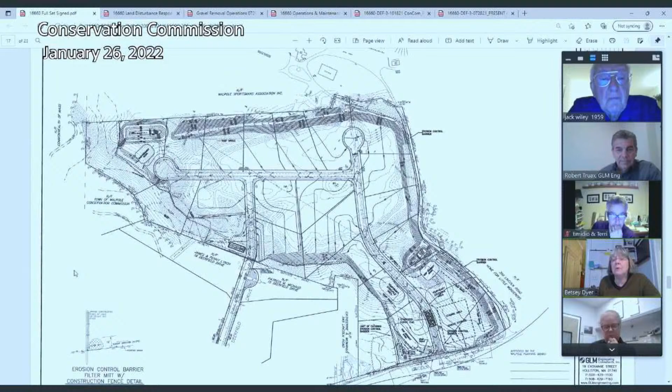And I guess I'm just going to conclude by saying, I don't think I even have a question here, that whatever it is that we end up approving is still contingent on it matching some final plan that doesn't actually exist yet. There's nothing that planning has allowed to happen yet. So I guess those safeguards are in place. We're not going to accidentally approve something that planning doesn't approve.

Ultimately everything's got to come together, and ultimately it's on you, Rob, correct, to make it come together. That's what Landis helped clear that up for me today. I was saying, like, what, that it's ultimately on you to get this all dovetailed together.

And so if you come back before us in a couple of weeks with the house lots, we'll do what we do as conservation commissioners. Right? So so you're correct, Betsey.

We can't put a shovel in the ground at this point in time. We don't have a subdivision approval. We're on appeal. So I mean, if it takes 6 months, 9 months, a year, and our thought is hopefully it's favorable to us that we can build the roadways, then we would start construction.

If in fact we lose on every account and we don't get planning board approval ever, the project wouldn't go forward, and the permits would either lapse or we'd withdraw them someday. But yes, you're correct, we can't build while appealing this with just our permit. It's in land court.

So no question then. I guess we'll see you in, some revisions. Yes. Yeah.

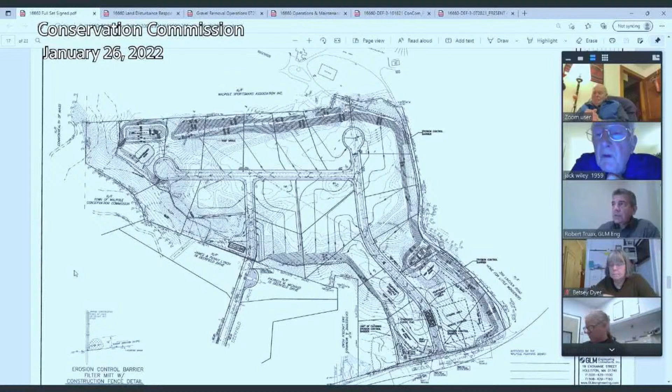Rob, does your plan describe anything to cover the issues that Al just brought up? Well, I think that's the same question Emidio asked, and I think we'll have a conversation amongst ourselves, the team here, and see how we want to phase it.

I'm hearing from the commission, I think you said this before, Mr. Chairman, at the last time we were here, that you don't want to see us go in and clear cut 24 or 20 acres or whatever it is all at once. And I think if we could phase it out, we do phase one, clear it, build a road, prep the lots, start phase two, clear it, build a road, prep the lots, and then come in and do phase three. It would limit the amount of clearing at a time.

So let us come back to you with a sequence on how we would do that and how we would phase it. Can I just add?

If I'm correct, under the SWPPP, under the construction permit, you're supposed to only have 5 acres cleared at a time, and then you have to stabilize and move on to the next 5 acres. Is that correct, under the SWPPP? When you file a SWPPP?

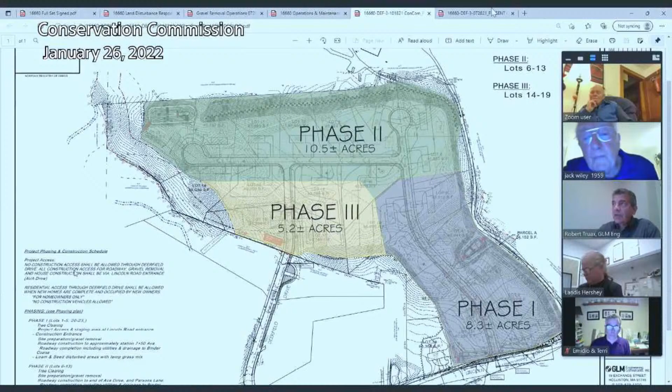So whatever we come up with probably should be shown on a plan, because the contractors look at plans, they don't necessarily look at stuff that's written up in a permit. I think it'd be important to agree on the plan. We do have some information about that on the plan, but we can beef that up a little.

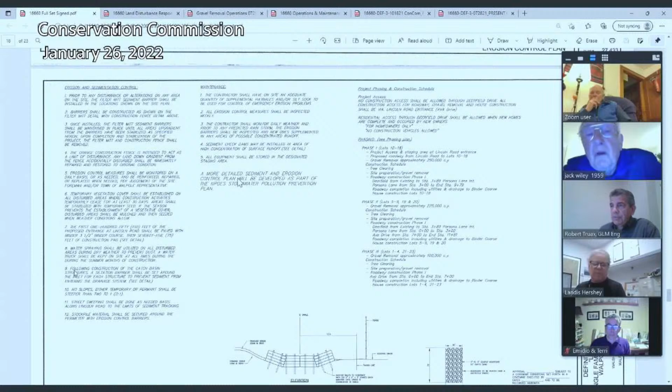Talk about watering and things like that for the dust control. And we do have a construction apron for the road that includes not just the stone, but we're going to put down a 3.5-inch binder course for the first 75 feet of road. We're going to prep all that so that when trucks are coming in and out, they're not just driving over gravel and then hitting Lincoln Road. We're going to give them a 75-foot paved surface, and then 75 feet of trap rock going into the site. So it's about 150 feet of stabilized entrance.

So there's things like that, but we'll take a look and see if we can give you a little more detail on it.

You've got a lot of vehicles coming in and out over a period of time, that's the reason for the entrance pad on the proposed road. In addition to having that, it needs to be maintained, in other words, swept if necessary or whatever. And I think, again, some kind of verbiage on the plan that would include that.

Sure. So let me ask the commission this question. I think, Landis, you might have spoken to John about the individual lots.

So the lots are going to get temporary vegetation. Then some may get temporary, some may get permanent. The ones that don't get built immediately, like in phase one, we'll put some loam down and seed those temporarily until they come in and start building the house. Some of them they'll start building the house on, so the road will most likely have a binder course at that point in time. The binder will go down first.

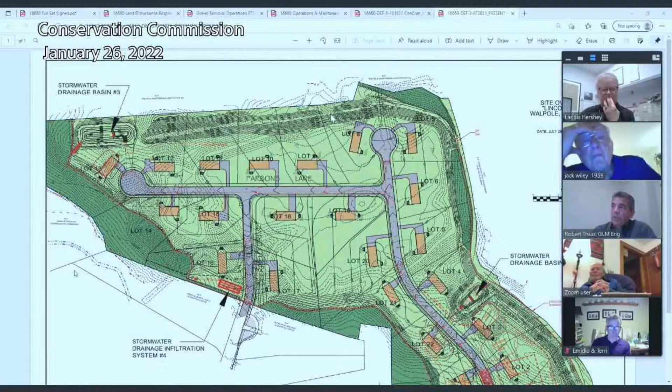So this will be about 15 to 20 feet in elevation when you walk out the back door of these houses. And so the idea was to try and get the berm high enough that even when you're looking out the second floor window, you can't see the Sportsman's Club. They'll see probably the roof line, but they won't see the windows. So we tried to get the berm as high as the gutter line on the house.

But for the lots, just again, so I understand, the abutters behind lot 14, the Shaws, if you scroll down, there, lot 22, all of that green stuff is undisturbed. This is all undisturbed. This is the riverfront right here, the 200 foot. That's the limit of what actually goes down in here, but there's no work in the 200 foot riverfront area. So all this is staying green.

Okay, the drainage, the abutters, you say this is the abutter, but the abutter's house is way up here by the arrow. But there's green on the other side too. Yeah, there isn't an abutter over here, but this abutter sits right in here. This is all wooded behind his house.

From that drain easement where it says drain easement back, that's all wooded. So that's great. And then for the other two abutters, that green space also would be untouched? This will all stay right here, correct? All this over here is staying.

Okay, and then you're putting, that red line is something that you're putting up? Those were the squiggly lines. It looks like it's red in some places. The red line in most spots is an erosion control barrier, which will signify the limit of work, so the contractor will know he can't cut beyond that.

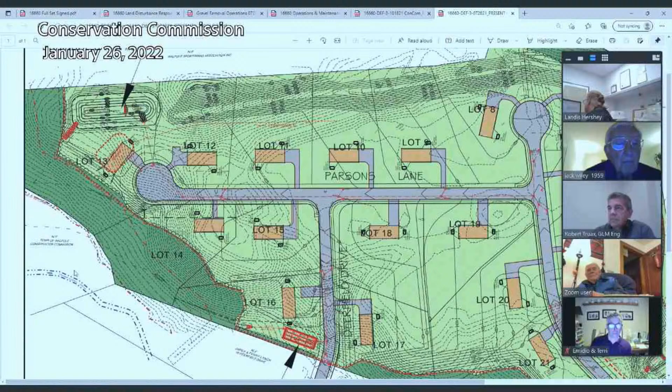If you look at the non-colored plan, there's two sets of dotted lines. One is a square dotted line, that one we see. Then there's a continued round dotted line that matches the red arc. It looks like the red arc was more the 200-foot perimeter, and that straight line was something different, and I was trying to understand the difference.

There should be circles on the lots too. I don't know if you're seeing these circles? No. So if you go to page 4, I'll explain better maybe. This is what I was kind of looking at first.

Page 4 kind of showed the drainage basin, see, there's that straight dotted line there. Okay, that's going to be the easement that goes around the basin that the town will have the rights to, so they can go in and fix it if it gets screwed up, if we don't maintain it properly. So there's an easement around the basin.

So then this circle, that's just for zoning purposes. That's just required under zoning that you have the circle. And then this dash line that goes around the lot, and this one around the circle, that's the building setback line. You can't build there. Those are the setbacks from the lot lines. We're not going to be way down by the river, but that's the actual zoning setback line, not the setback from the river, but that's a zoning setback.

Okay, so that easement line isn't part of a boundary, that's part of the drainage easement that's necessary because of the emergency runoff basin? That's something different? No, that's the drainage easement for the drainage basin for the runoff. Yeah, that basin is built within that.

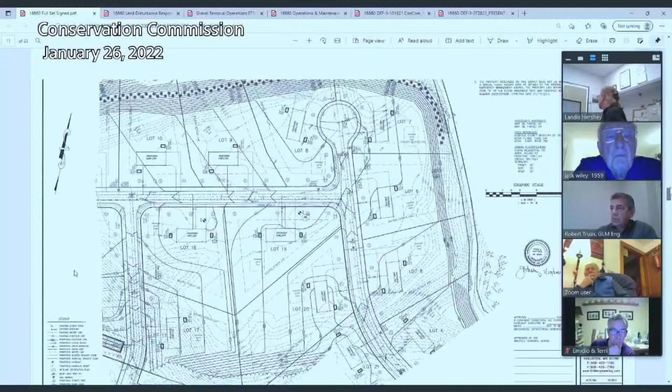Right, so that line where the squigglies are, or whatever you want to call them, here, yes, that continues, that's the easement line. So the basin is within that. It goes around this spillway and it goes back to the property. So this whole piece right here around that line is all the drainage easement.

So then what is that straight dotted line to the left of the squiggly line? Straight dotted to the left of this one here. Yeah, so if you follow that, is that the 200-foot? This is the 200-foot right here, coming all the way down.

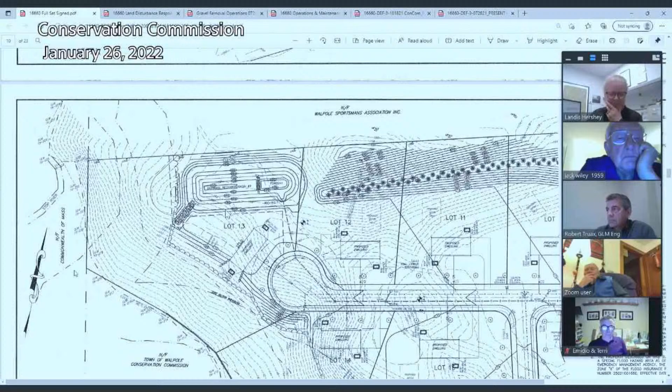This squiggly line you talk about, that's the limit of work, yes. Okay, so that squiggly line that continues up by the drainage basin, that's also the limit of work? Correct. Okay, got it. I thought it was, because they had that dotted line, I wasn't sure what that meant. Thank you, that was very helpful.

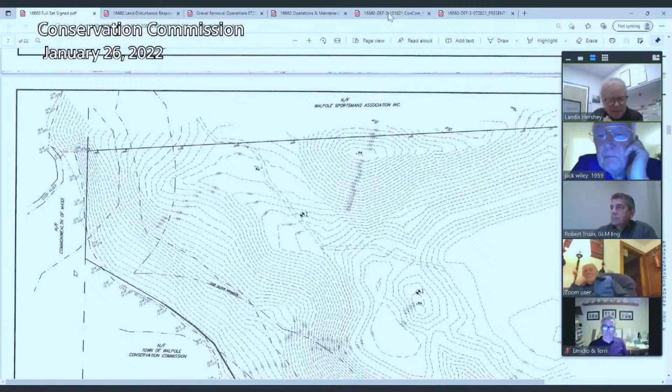Okay, anything else you all set, Eden? I think so. I'm sure I'll have more when we see the revisions. Let me mute myself. Thank you very much.

There's another abutter, Kay Williams, that has a comment.

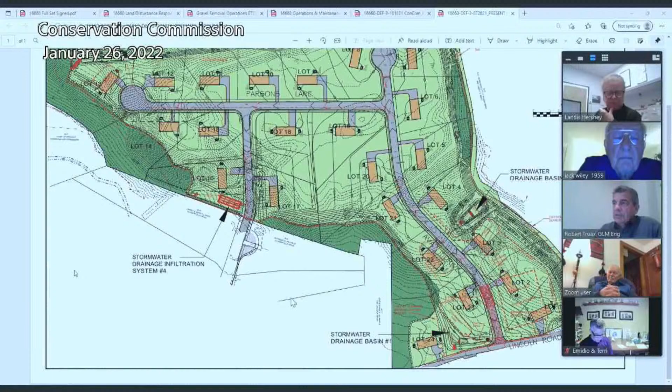Yeah, but we were told that a berm would actually be built. Well, it technically is being built, but it's being built by grading on the back side of it. It's not like the one on the back side of the site, where we're physically putting all the material there. This material's already here, we're just going to cut it down on one side and leave it standing up on the other. So if we look at that berm, it's not really a berm, it's just that.

Yeah, when we look at that, will we see all the things that are there now, the trees, the bushes? You'll see some of it. I don't want to misrepresent it - when the trees come down, you'll see the clearing, you'll see through the woods. I don't want you to get the impression that I'm leaving enough trees there that you'll never see any of these houses.

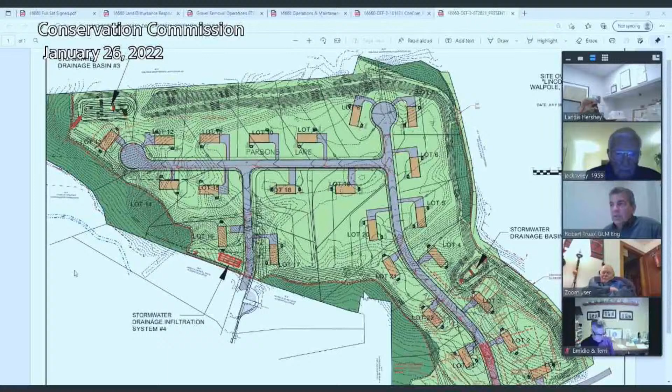Oh, I understand that, but on our side of the hill, you're not removing any trees, correct? On our side of the hill? On the downhill side of the hill. Right, okay, okay, good.

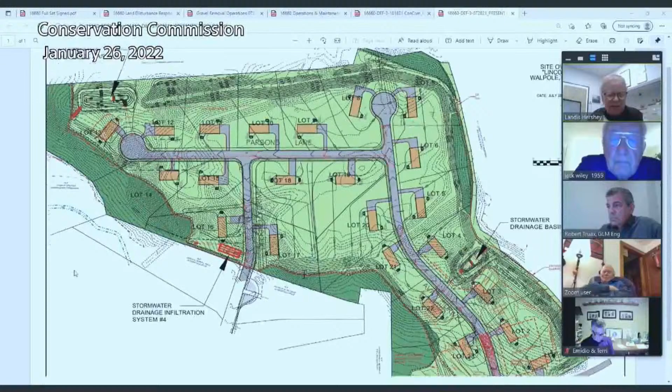So maybe, Rob, just down by Deerfield Drive on that side, what is the lowest elevation at your lot line? I think it goes down about 180, and then the top is 194, 196 maybe, but it still goes down on their property a little. So it's about 14 feet up.

We actually staked this line in the field for those people who live right here. My surveyors went out there and staked that last fall - the top of the ridge. We went out there for this woman at 545 McManus, Catherine, I don't know if she's on the line. I'm not sure, maybe we have the abutter wrong, but we staked this for the abutter right here, and I think we staked her lot corners as well, so she could see the limit of clearing in the lot corners if anyone wants to go out and look. On the commission side as well, that's staked - we staked that limit of clearing, that red line, we staked those corners. We did that for the abutter some time ago.

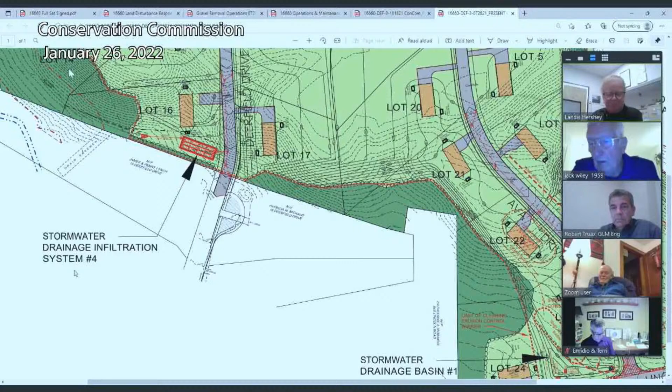Now's the time. Just a minor thing, Rob, on page 13, lots 1 through 4 are labeled incorrectly. They should be lots 2 through 5. It doesn't impact anything, but I'm assuming you'll want to clean up the plans so they're labeled right. Thank you.

Rob, how much time do you need? How long do you want, when do you want revisions submitted prior to the meeting - 10 days, 2 weeks? I don't want to give you plans 2 or 3 days or 5 days before the meeting. If you want, we can go out 4 weeks. That'll give us 2 weeks to give you plans and 2 weeks for you to look at them.

I think that's a good idea. Then that gives time for Carl to also take a look at them, so we can both be on the same page. So you want to go to the 26th of February, or the 23rd of February?

Sure, February 23rd. So do we have anything else on at this point, Landis? Nothing advertised and scheduled. Okay, so someone make a motion to continue the Lincoln Road hearing until February 23rd, 7 PM.

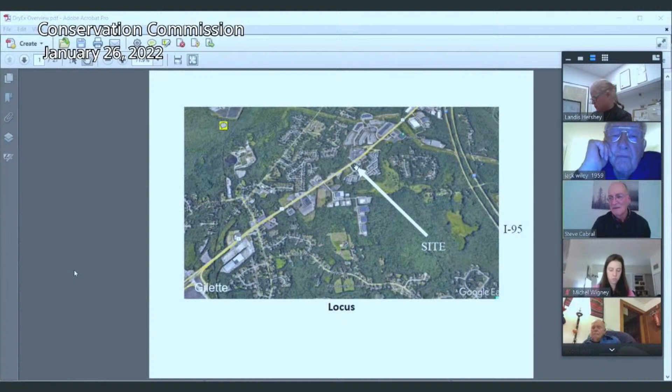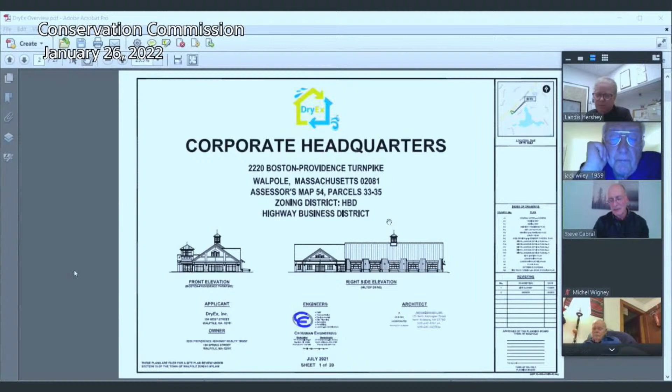Basically, what we're proposing is the new corporate headquarters of DryEx. One of their specialties would be basement waterproofing. The project is in the Highway Business District, and it's not within any wellhead protection areas, but it is within the town's Watershed Protection District 3.

We're proposing a relatively small parking area with enough maneuvering ability for fire trucks to come in off Route 1, loop around the building, and then exit on Hilltop. The site is highest along Route 1, and it drops by about 8 to 10 feet from Route 1 to the back. Because of that natural topography, that's why we're locating an infiltration pond at the very back of the property.

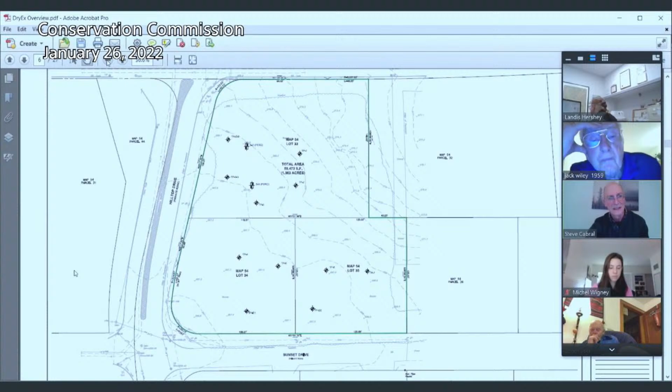This plan provides the general topographic conditions, and as you can see, it's a very gradual drop-off and slope towards the back. All of these circular symbols represent the many test pits we performed out there - some we did on our own, but most we had Carl, the town engineer, witness. Because there are no public sewers, we also had some of the soil tests witnessed by the town's health agent, because we will have a small septic system.

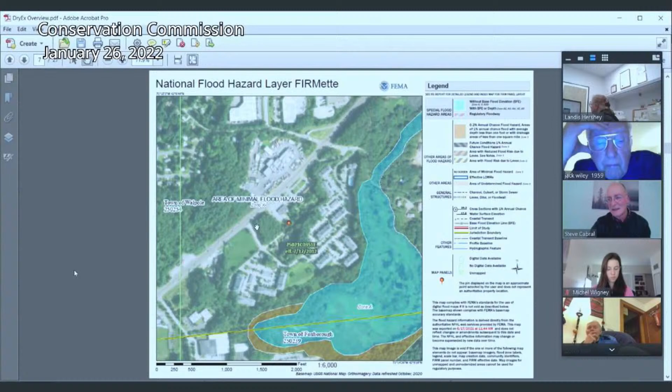One thing I wanted to point out is that we're outside of any flood zone areas. The green area here with my cursor is where the site is, and as you can see, the nearest flood zone is probably 1,000 feet or so to the east. There are also no wetlands on the property - the site's good sandy soil, with no evidence of any wetlands, and no depressions on the site whatsoever.

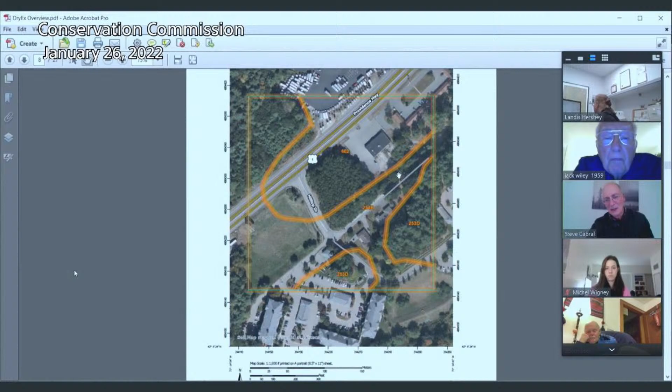This is just the NRCS, the Natural Resource Conservation Service, soil map, which we used before we performed any soil tests to get an indication of what the soils are. NRCS identifies the soil on the site as urban, meaning most of the land has been urbanized or tilled over the years. But we know that's not the case for our property, so we looked at the surrounding soil, and that was identified by NRCS as sandy loam.

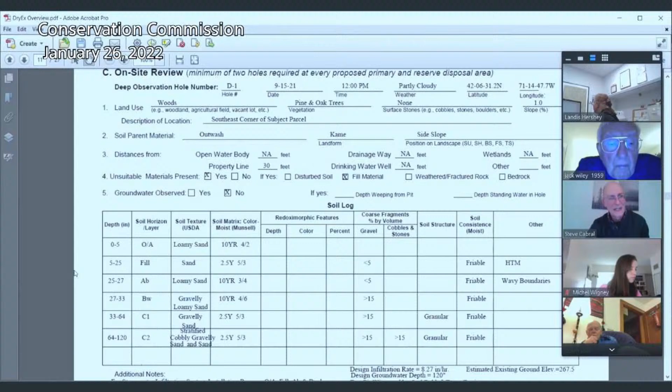And then we followed up with the many soil tests that Carl mentioned in his letter. This is just one of the samples of the soil logs. On this one, we excavated down about 10 feet, as you can see on the left. The soil was all loamy sand, gravelly, very good draining soil. And as Carl indicated, there was no sign of any seasonal high water table. So for the design, we're using a 10-foot deep water table.

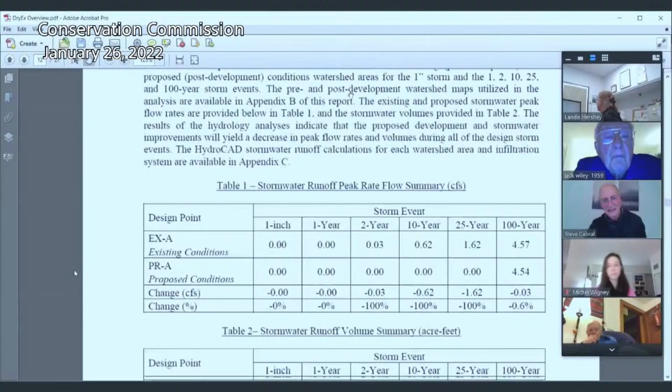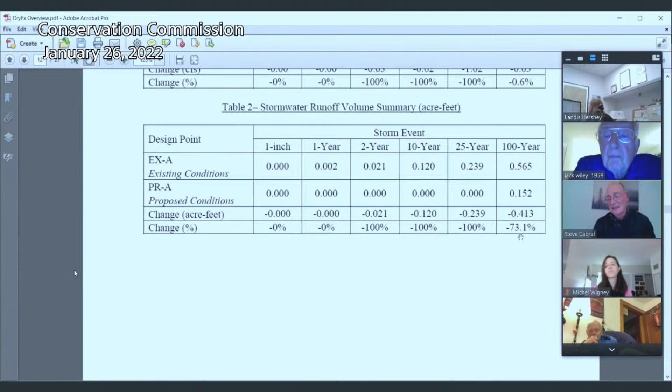Now, when it comes to the overall drainage design, I'll just go right to it. Because we have such good soils and the ability of building an infiltration basin, the EX represents existing conditions, the PR the proposed. As you can see, for the runoff volume exiting the site, for all storms up to the 25-year storm event, we're going to capture all of the runoff and infiltrate it on site. It's only during the 100-year storm event that there'll be any effluent leaving our infiltration pond, and even that discharge is 73% less than the volume that discharges today. So in regards to any drainage issues in the area, there's going to be a significant benefit.

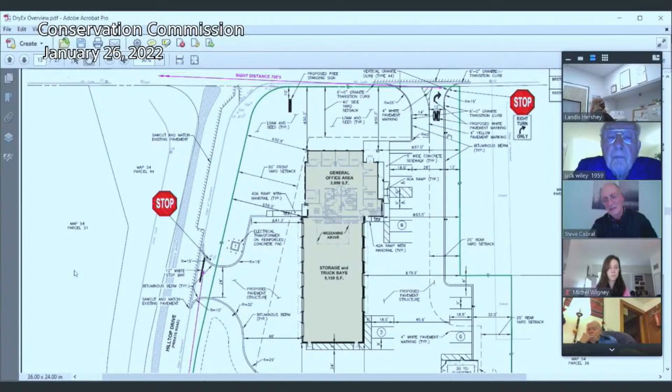Okay, what I have here is just the overall general layout plan to give you a feel of access. Basically, on Route 1, this is an area where there's a median down the center, so we only have right-in, right-out access on Route 1. So the intent will be employees could either come down Hilltop and enter, or they could take a right turn into the site. They'd park right at the office areas, and then they could exit, of course, with the right turn only. We wanted to minimize disturbance, so we kept the number of parking spaces to the absolute minimum.

You could see we have a lot of excess space where we could have added more impervious surface, more parking, but we really didn't feel that was necessary. And with this parking we're providing, it does meet essentially the minimum required by zoning, and it does actually provide just as much parking as the corporate headquarters of DryEx needs.

Okay, this is the grading plan. Basically, we designed the site in a manner to minimize cut and fills throughout the site. In order to do that, we basically took advantage of the natural terrain. As you enter from Route 1, there'll be a gradual slope down, and then the garage bay areas are slightly lower than the general office area. Then, because of the garage bay doors on both sides of the building, the ground will be relatively level around the building, and there'll be a slight 2-foot elevation drop to get to Hilltop.

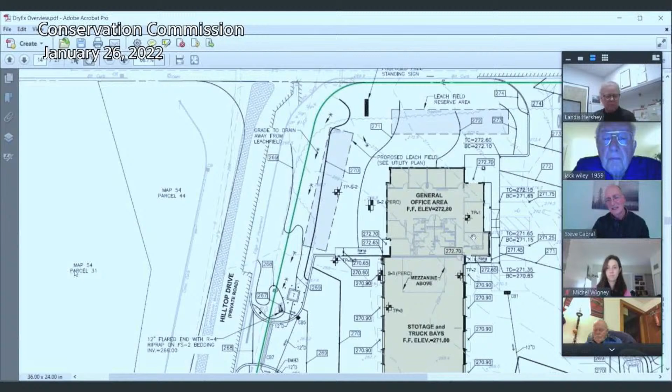As you can see, all of the drainage will be collected on site with catch basins, and they'll be routed into this infiltration pond. The shaded areas at the top and to the left represent the location where the septic systems, the leach fields, will be. Now, at DryEx, the maximum number of employees is relatively low, so the amount of septic system effluent is essentially no more than a 4-bedroom home. It's not a very high user of septic flow.

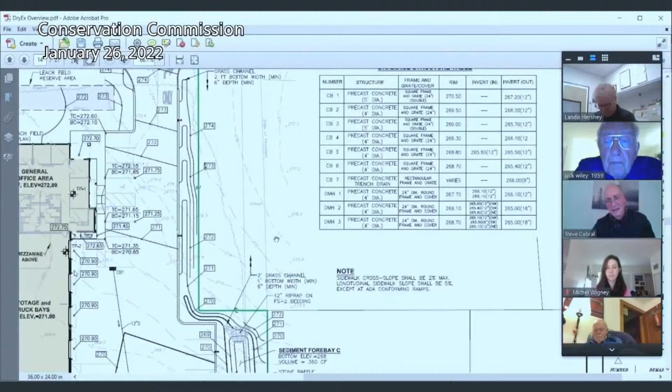And again, we'll be applying to the Board of Health for the leach fields, and we will not be seeking any waivers by any means. Now, with the runoff, we also have an adjacent site, right now vacant, but there's a paved parking lot and it looks like an abandoned building. Some of their runoff actually drains onto our site. So what we've done is accommodate their flow by installing a swale so we can capture their runoff. We'll have it flow through a sediment forebay to help remove the larger solids. And then our infiltration basin is actually sized to infiltrate all of their runoff up to the 25-year storm event also.

Now, I did hear the chairman say, as he was reading Carl's letter, that there was a question about a 6-inch pipe. What that is, the 6-inch pipe is not needed for the operation of the system. What we try to do, and what we always do, when we design a system, is match the DEP recommended design as much as possible. And in the DEP Stormwater Handbook, what they recommend, where feasible, is that you install a perforated 6-inch pipe below the bottom of the infiltration basin with a gate valve.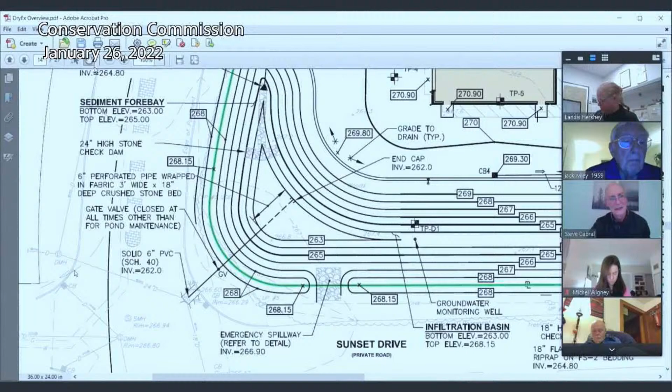And as you can see right here, we say that the gate valve will be closed at all times other than for pond maintenance. The only reason for that 6-inch pipe is so that during maintenance, when you're removing any sand or silt, if there are any pockets of water, you could open up that gate valve to help expedite draining of the pond during construction. But as I said, it's not part of the operation during rain events, because that gate will be closed at all times other than maintenance. So if there is any concern, that 6-inch pipe could just be eliminated.

Okay, the next plan provides essentially the overall utilities. It shows that we'll be bringing a new 8-inch water main down from Route 1 down Hilltop into the new building. We'll also have underground electric and telephone going to the building, a gas service, and at the top left, a 1,500-gallon septic tank flowing into our standard leach field, which will be in the grassed area.

On this sheet, we have our standard soil erosion and sediment control plan, where we discuss measures to control dust and any potential erosion during construction. On this site it was relatively easy because everything drains from Route 1 down to the back. So we're proposing the silt fence, or compost filter sock, around the entirety of the site, at the bottom along Sunset, and also at the top to protect the future infiltration basin.

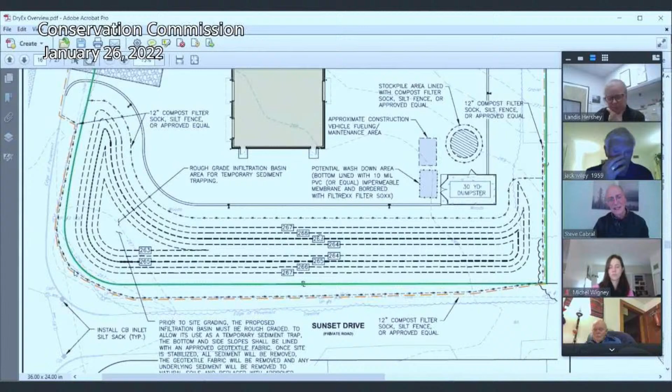Because all of the runoff naturally drains towards the back at Sunset, we looked at different options to create a sediment forebay, and what we decided was the most effective option would be to partially excavate the area of the infiltration basin, line it with filter fabric, and use that for the temporary sediment pond. When the site is stabilized, we'll be able to remove any collected silt and the filter fabric, and then continue with construction of the full infiltration basin. Normally we wouldn't use an infiltration pond as a sediment pond, but because of the topography we felt it's really the only option, and we can mitigate any potential impacts by utilizing a filter fabric on top of the excavation.

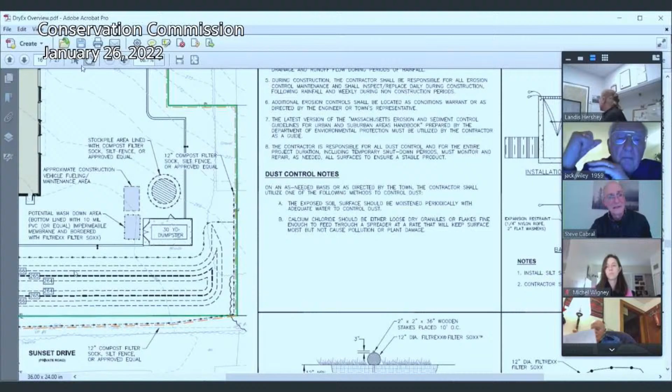As you can see here, we do mention dust control notes. We want to make sure the contractor's aware that he may need to utilize water or calcium to control any dust that could impact the area. And we have all of our standard details.

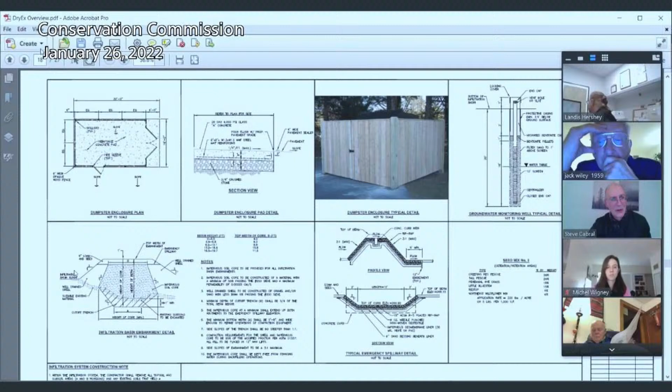Continuing on, we just have our standard construction details of the curbing, the sidewalks, and so on. We'll have a concrete pad for any type of waste disposal. And we have additional details, like we're recommending putting in a groundwater monitoring well through the bottom of the infiltration basin.

That will allow us to monitor the water table at any time during the year, and would also allow us to take water quality samples if there was ever any need to. We also provide details of how the earthen berm will be constructed so that water will remain in the infiltration pond and seep, with an impermeable soil core so that water won't seep through it. And then, as Carl mentioned in the letter, the bottom of the infiltration basin is substantially higher than the groundwater we anticipate.

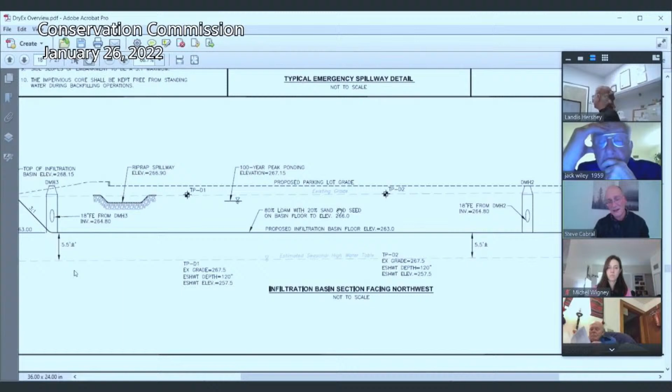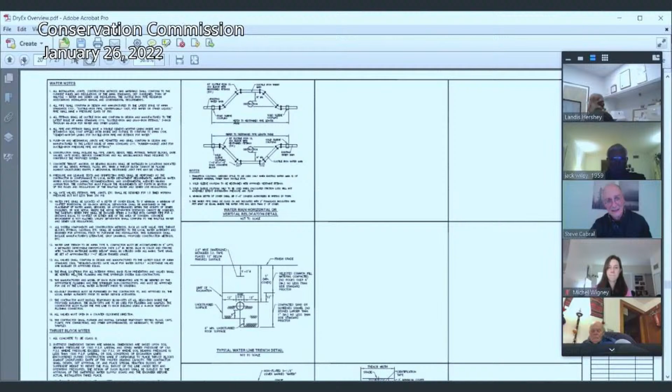The details show that the bottom of the pond is well over 5 to 6 feet higher than the seasonal high water table. And again, that's a very conservative estimate, because we actually excavated more than 10 feet and never did hit any sign of a seasonal high water table. Then we also have our standard catch basin and drainage details, water notes, and septic system details.

Then we also prepared a lighting plan to show that the design would be dark sky compliant. The parking lot and walkways will be lit so that safety will not be an issue, but we've laid out the lighting so that there would be no impact onto the abutting properties.

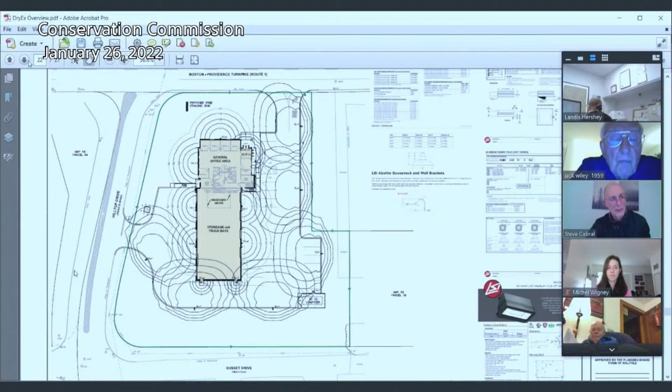And just more landscape details, the floor plan of the building. As I said, we have about 3,000 square feet of general office space, and then about 5,000 square feet of truck bays in the back.

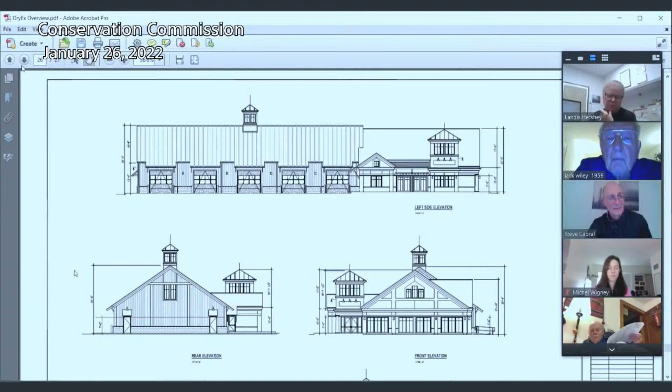We also provided the general image of what the building facade would look like. At the very bottom, this would be the view from Route 1, and this would be the view from the main parking area. So I consider it to be an attractive building.

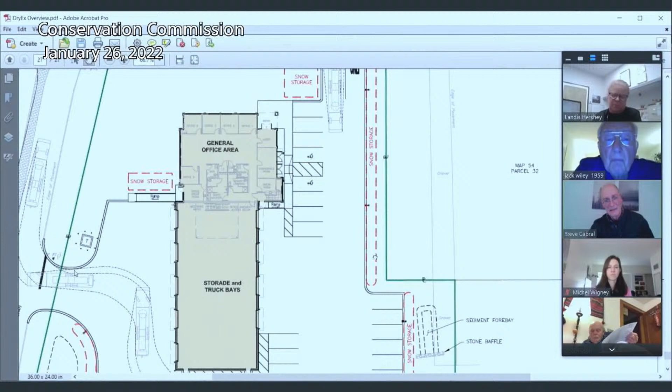We also provided for the fire department a truck turning template to show that the fire trucks could enter the sites without having to extend into the opposing lanes, and they could maneuver around the sites and back out through Hilltop. We've also identified areas along the front side and back for snow storage. If there was any significant storm event, there may have to be some removal, but for typical snow events, we have adequate space for snow stockpiling.

We do not recommend that it be stockpiled in the infiltration basin because we don't want the subsoil compacted. That was another reason we put the evergreens there, so the snow would not be easily pushed into that area.

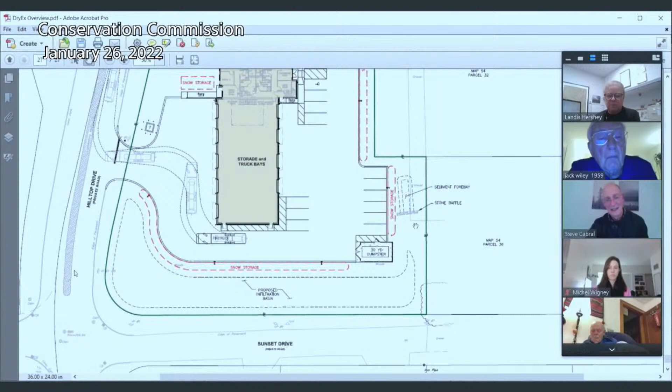Now that's a very quick overview. As I said, we did receive Carl's letter just hours ago, and I haven't had a chance to read it all, but based on listening to the chairman's read of the letter, we don't see any issue with Carl's comments whatsoever. The main bullet point I gathered was that he indicated the overall design is acceptable, and he didn't see any reason for any major changes. They all seem to be relatively minor.

It looks like his main question was the reason for that 6-inch. As I said, that's solely there as an option to assist during maintenance, but it has no impact whatsoever during a rain event because that gate valve will be closed at all times.

Okay, Landis? Yeah, so I just received Carl's letter late too. I asked him to get one together before this hearing, and we both agreed that the stormwater management was done rather well and very thoroughly.

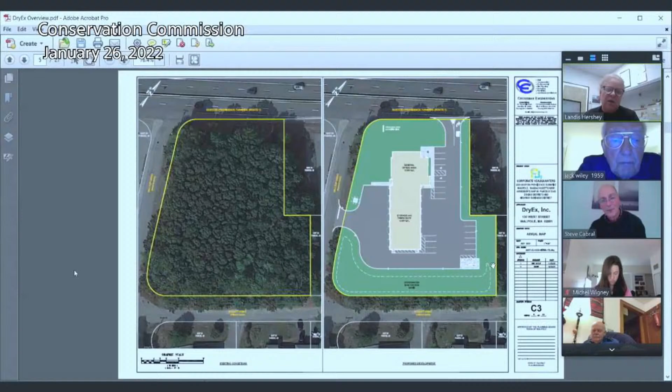One of my questions is, as we're looking at this picture right now, it's a vegetated site. I can't tell from the picture if that's mostly trees. I think in our stormwater erosion control bylaw, it does ask to give an inventory of the vegetation on the site and if there's anything that can be used in the design or saved. So that would be one of my questions. It didn't seem like from your plan that anything was going to be saved.

I was looking at your landscape plan, and I couldn't quite tell how many trees were going to be planted. There didn't seem to be a number of the amount of trees that were going to be planted. So I was wondering about that.

The other thing I noticed is with your dumpster down to the rear of the lot next to the infiltration basin, I did notice you had a fence, but I'd like to see a pad with a rim, just because you're right up against a basin and we want to prevent anything from getting into the basin.

I didn't get to all your material, it was all very thorough. Maybe if you could just go over briefly your phasing of the lot, how you're going to go in. I'm assuming you're going to go in and cut down all the trees, put erosion control up, and grub and prepare, but if you can just briefly describe that.

I just have, my other comments are more that would be conditions if the commission closes and issues a decision.

Okay, hopefully I'll remember your other questions, but basically, because of the change in topography from front to back, there's about an 8 to 10 foot drop from front to back, and we need to build a level pad to create room for a functional building. Because of the need for a level pad for the building, as well as the need to build a septic system, which really can't have mature trees within 10 feet because we can't have the tree roots growing into the system, we do essentially have to remove all of the existing woods on the property, unfortunately. That's why we had our landscape architect prepare a thorough landscape design.

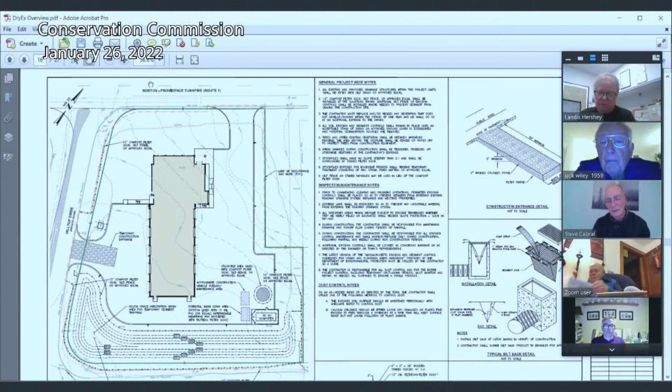So for this site, being about 1.3 acres, less than 1.5 acres, it has to be done in one phase: install the erosion controls, do the tree clearing, install the sediment basin. Only after those steps are completed can they begin removing or moving around the soil. We estimate the excavation on site will be about 1,500 cubic yards, but we'll need about 2,500 cubic yards of fill brought in. So we have not designed this site to have a net removal of soil. We intend to keep the soil on site permanently, and we'll just bring in new material to create a good gravel subbase for the buildings.

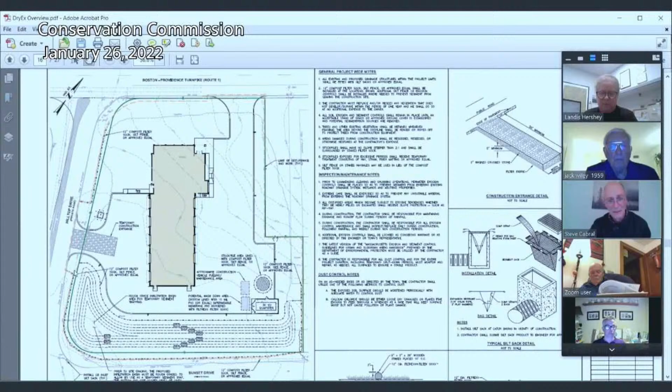Okay, and when it comes to the dumpster corral, we do have a 6-inch reinforced concrete pad, but I agree it's a good idea that we could install a 6-inch lip on the outer edge of that dumpster pad. That would be easy to do, and that is a good idea.

Now, when it comes to the landscaping, let me go... I could easily have someone count, but as you can see on the right side, the column, the items in that column just represent the variety of species. So this indicates 1, 2, 3, 4, 5, 6, 7, 8, 9 — essentially 9 different species of trees and a dozen or so shrubs.

Now, the truth is, in the old days we used to always give a count on our plan set, but we found there was an issue with contractors if the plan didn't match the count — which one do they follow? So we have our landscape architect design the landscaping to provide the size and variety as opposed to the count. But we could certainly provide that to you.

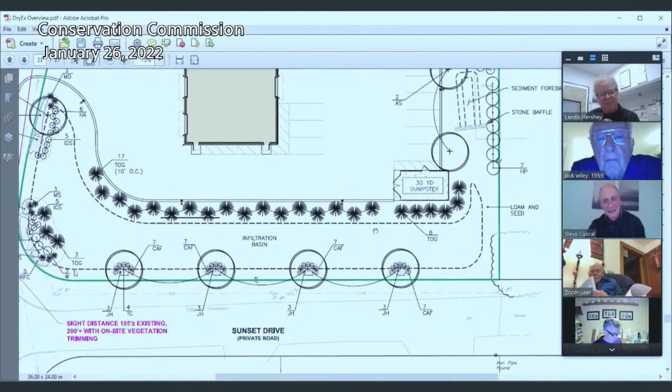There's certainly well over a couple dozen. Actually, if we looked in each little area, for example right along the infiltration basin, this shows there are 17 of that specific variety, plus an additional 6. On the right-hand side there'd be 7 of the HPs. I was starting to do that, but it was getting cumbersome to look at the chart to find the species and then go to the plan to count how many.

But yes, I guess the point would be that the trees are hopefully hardy, somewhat comparable indigenous trees, and not just decorative ornamentals, so they'll have some value for shading and climate control. Yes, those are certainly good points, and that is one of the goals of our landscape architect.

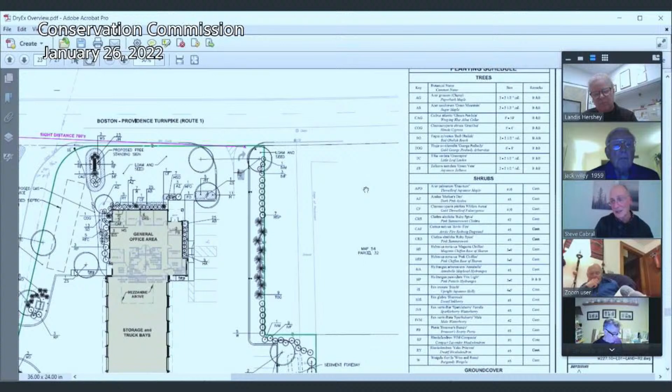Okay, and so I think you pretty much answered all of my questions. Oh, thank you. Okay, so are you done, Landis, that's it for now? Yeah, go ahead. Okay, I'm all set. Okay, Dean? Yeah, no questions, I thought it was thorough. Bailey, no questions. Doug, I have a couple questions.

One of your plans showed a vehicle fueling area. Is that only during the construction phase, or the whole time it's occupied? That is only during construction, and the only reason we show that is it's one of the recommended features that DEP and EPA recommend we include on a soil erosion control plan. That's really not meant for trucks — it's like if they have a chainsaw, that type of equipment, certainly not vehicles.

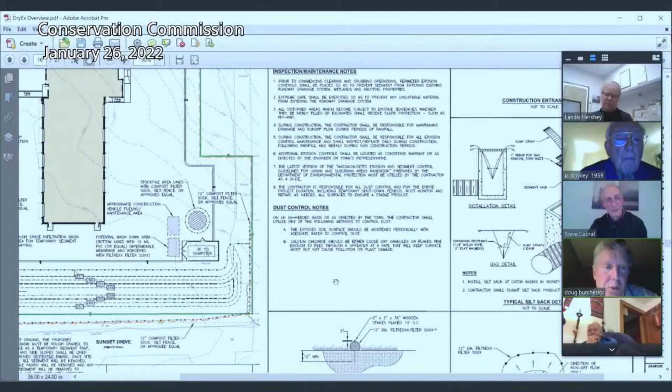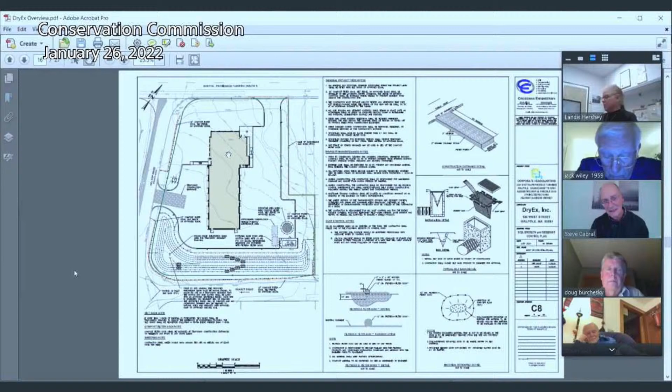Okay, and then another question: inside the building, is there any chemical storage going on there? Only, no chemical — there would only be solid products like their equipment. But if for some reason they happen to have any, it's not a company that relies upon large volumes of chemicals, so it would only be small quantities that you'd typically find at any type of business.

Oh, one thing I should have mentioned, and I'm glad you brought that up — because there will be vehicles inside the truck bays, there will be a floor drain. What we're proposing is that all of the floor drains will be connected into a solid holding tank, and that holding tank would have to be pumped and brought to a licensed facility. We wanted to make sure the floor drain certainly cannot go into our septic system, and certainly not into our drainage system.

And Steve, can I jump in on the chemical question real quick? Yes.

The company DryEx Waterproofing acts basically as the hub for a predominantly off-site contracting business. Most of the work they do is installation of sump pumps and other basement management systems. So what will be predominantly on this site are the offices that manage those appointments and the business itself. The back area for truck bays and storage will be predominantly hard materials like aggregate, equipment like mechanics, actual pumps, and all the trucks going to homes. So minimal or non-existent chemical storage.

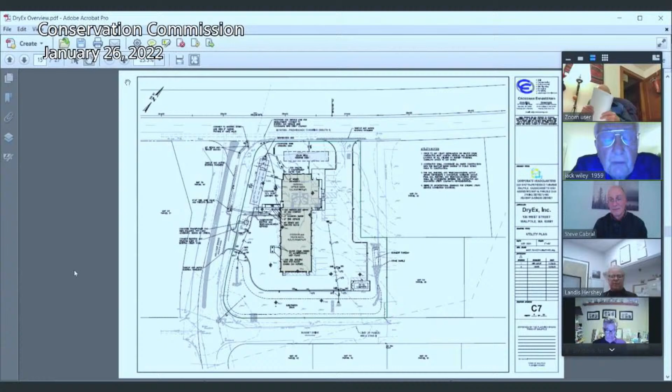There are two primary methods of treatment. Because the soil is very sandy and has a high infiltration rate, we're obligated to remove 44% of the total suspended solids before the water gets to the infiltration basin. So we have two mechanisms: deep sump catch basins and a sediment forebay. Only after the water flows through the deep sump basins and the sediment forebay does it overflow into the main body of the infiltration basin. So essentially, we're going to remove the majority of the solids before it gets to the main body of the pond, where the water will seep into the sandy soil.

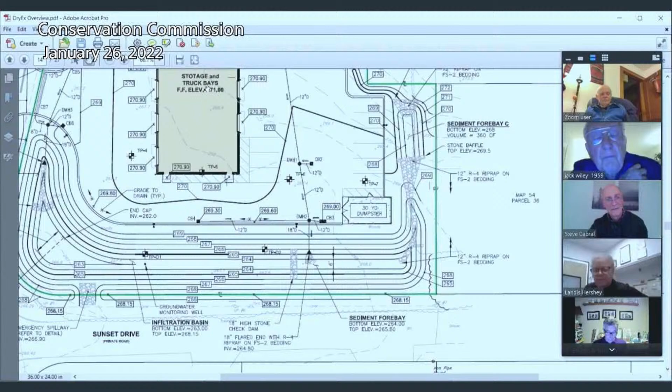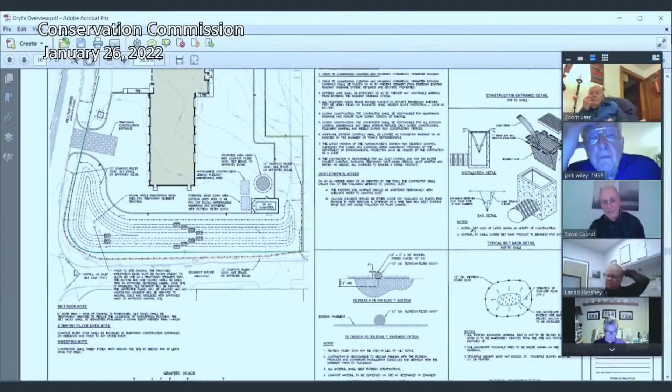What about oil dripping and that sort of thing that's typically on a parking lot? For all of the deep sump catch basins, we're going to have hoods, and the reason for the hoods is that they provide an opportunity... let's see if I have a detail. So it's a typical skimmer for oil and gas, yes, we have a typical hood. Here it is, the catch basin hood. So with that, any floatables are going to be kept inside the basin because of the hood.

Do you have a maintenance schedule for that? Is that shown on... We do, as a separate document we provided, an operation and maintenance plan.

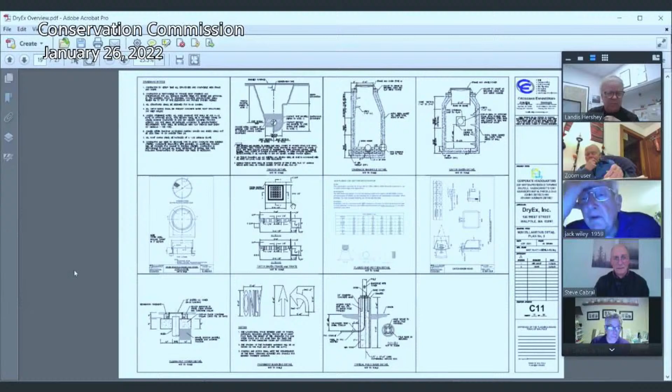Okay, good enough. Anybody in the audience have any questions or comments? See anything, anybody, Landis? If there's anyone in the audience, you can just unmute yourself and speak up, or let us know in chat. Okay, there doesn't seem to be any comments.

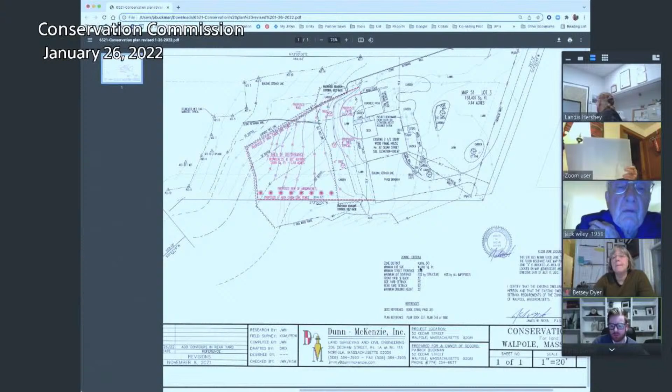Yeah, right there. And then one—what's the scale on this drawing? One inch is 20 feet. So probably one halfway up the length of the fence. Up the side? Yeah, somewhere around in there. And then one further up where that bends.

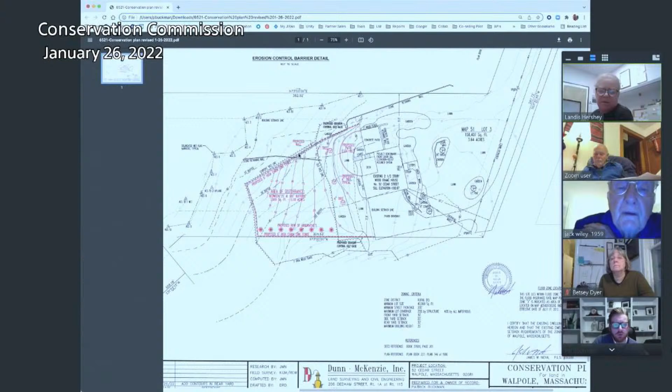I don't see what that stone wall is—is it? Yes. Okay, so one up there. Keep going up a little more. Yeah, right about there. I would move it back to where the stone wall is, you've got a line there. I assume that's the stone wall? Yeah, where the stone wall curves right after the fence. Just keep it there, so you'd have 1, 2, 3, 4 plaques.

You can get the detail from the office on what goes on the plaque. In this case, if that fence is all the way up there, you could mount it on the fence since those posts would be permanent. Is that okay, Landis? Yeah, what we would do is just reference it in the order. Okay, four plaques. All right, does anybody have anything else?

Okay, someone make a motion to close the hearing. I'll move it. A second? Okay, second, was Al. All in favor—Dean, aye. Bailey, aye. Doug, aye. Medio, aye. Betsy, aye. Al, aye. Jack, aye.

Okay, and the order, as we have stated—anything else to add? We'll just review with reference to you: the 4 plaques, and that if there's any stockpiling of material, it should be ringed by another set of erosion control. Was there any issue with tracking, or is that driveway paved? Yes, it's paved. Just put in something that if dirt gets carried down into the street, it needs to be cleaned up. Okay.

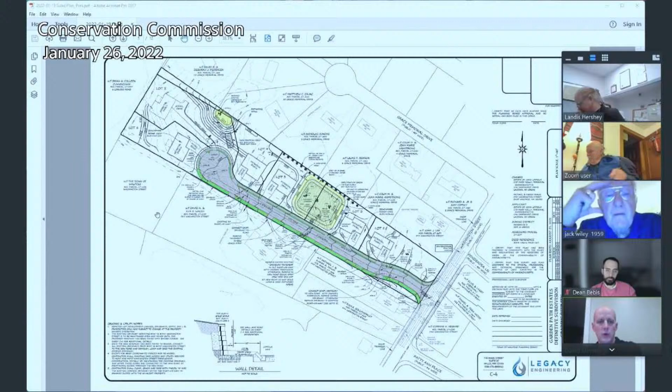This is a proposed 6-lot, single-family subdivision located at 585 Washington Street. It's close to the Bird School, just beyond the Bird School, heading towards Norwood on the left. At the time, there were no wetlands on the property, so this is strictly a land disturbance permit. At the time, we had not yet appeared before the planning board.

Since the October meeting, we have been working with the town engineer, Landis, and the planning board on a series of very minor plan changes. The substance of the design has not changed at all. If you recall, this is a unique site because all of the surrounding areas drain down into the property. There's a low point at the bottom of the property, right in the middle, so it's really impossible for runoff or erosion to leave the property. So we have a stormwater basin designed here to accommodate the additional runoff from the proposed homes and the proposed road.

We have a comprehensive stormwater management design, which has been reviewed by Carl. We have an erosion control plan and a stormwater pollution prevention plan that spells out all the traditional requirements for sediment and erosion control, including construction entrances, perimeter controls, and periodic inspections. I know Landis has a few notes she'd like added to the plan, which we're happy to do, but we're hoping we can close this tonight and deal with that as a condition of approval. Beyond that, I'm happy to answer any questions.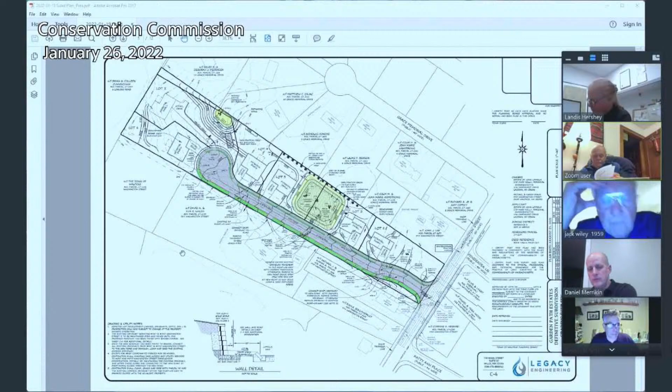Okay, someone make a motion to close the hearing? So move. Second. All in favor? Dean, aye. Bailey, aye. Doug, aye. Emidio, aye. Betsy, aye. Al, aye. Jack, aye.

Okay, the order, Landis, do we need to make a note about that wall or just wait and see what happens? I guess wait and see. Okay, usually if it's an interlocking wall that's structural, we don't want it to change over to a rock wall, which isn't structural. But how high is that, Dan? There aren't any rocks out there, so it's only 3.5 feet. It's not really structural. And it's not a significant wall. Okay.

Okay, so we don't need anything else included other than what you mentioned in your report? No. Okay, all right, someone make a motion to accept the order as noted. I'll move it. We have a second? I'll second. That was Bailey.

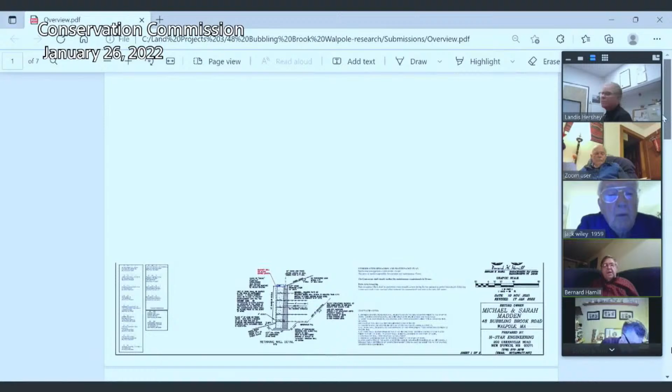If I can get into screen sharing, I have an overview of what we presented to the commission in the last iteration. Basically, we took your last set of comments to heart, and we pulled the wall in significantly, reduced the area of disturbance significantly. We've gone from 4,300 square feet down to about 2,000 square feet, which is a 50% reduction of the disturbed area. We completely redesigned the wall and provided a maximum height of 8 feet. In some places, it was previously 9.5 feet, so we reduced that down considerably.

We also removed the fill for the most part on the exterior of the wall. We did leave a little bit in this particular corner here, just for grading purposes and to keep that wall at 8 feet with a consistent reveal all the way around. So we've actually projected the wall less into the riparian zone than it previously was. We've also added a no-disturb area as part of the project construction, so this is the limit of work along this little blue line here. We also have, for drainage purposes, pretty much a 5-foot landscaping area all the way around the patio area to collect any water. It'll be filtered through the drainage system at the base of the wall, which is a stone filtration system, and then exits at various points from the wall into the wetland area.

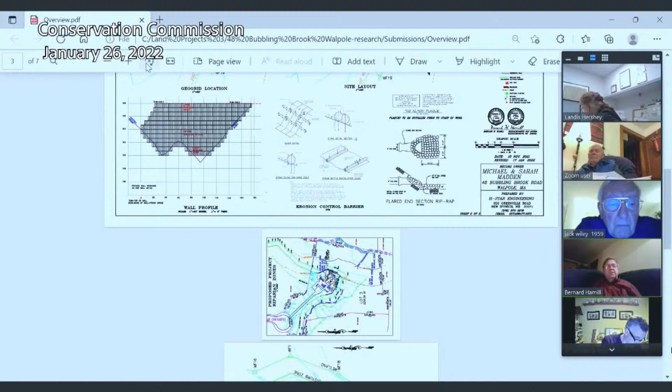We did try to minimize the impact as much as possible. We also provided some alternatives as part of our submission. I don't know if you can see them very well. Normally I rotate these around. Let's see, I'll take that one a little bit more.

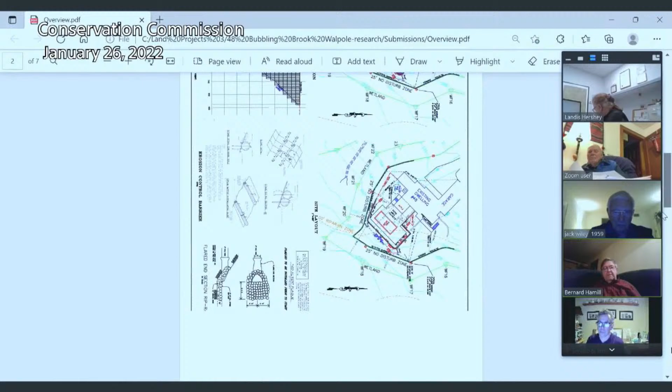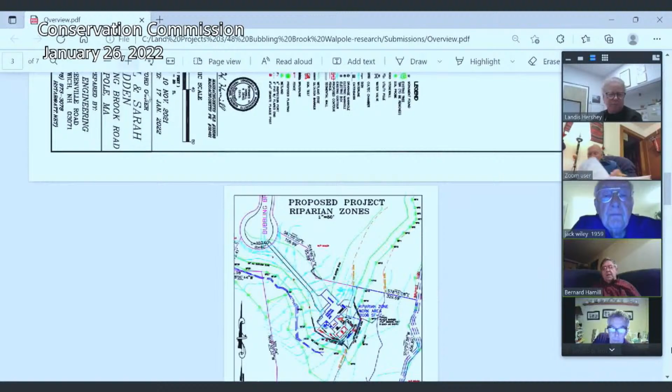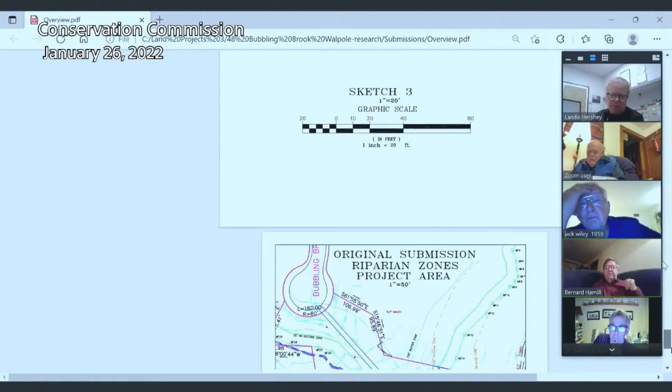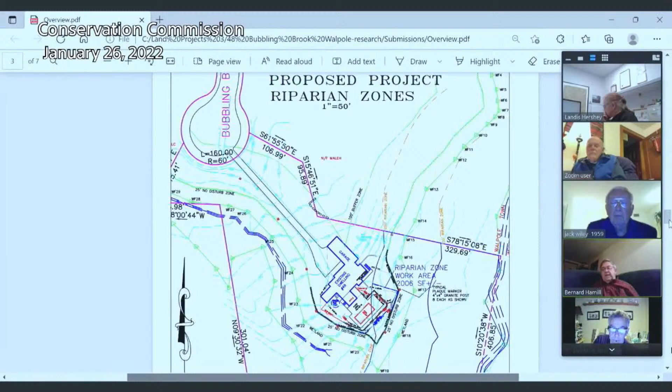This was our proposed project area. Let's see if I can blow that up a little bit. Again, this is our final alternative. We did come up with some other sketches that we had previously looked at where we had the pool projecting extensively. This was one of the sketches that you requested. We also looked at a major wall where we're coming right up to the no-disturb zone, this is sketch 2. And this was another sketch that we looked at before we came down to the proposal we looked at last week, which had the wall area coming out here. We've backed that off considerably, such that we are now pretty much minimizing that impact and getting it down to a total of 2,006 square feet of work in the riparian zone.

Hopefully this meets with your approval, and we would hope we could close this meeting out tonight. Okay, thank you. Landis?

Yes, I thank you for taking another look at this site and seeing how you could minimize the project, taking some of the activity out of the riverfront area. I appreciate that. My only question is the areas between the wall and the no-disturb area—will those be seeded, lawn, grassed? It'll be grassed. That's why we pulled the wall all the way back where we did, so we could just grass that area and restore it as much as possible. Okay, that's my only question.

Dean: I agree, thank you very much for doing this study, no other questions. Bailey: No questions, nicely done. Doug: No questions. Emilio: No, looks good, I have no questions. Betsy: No questions. Al?

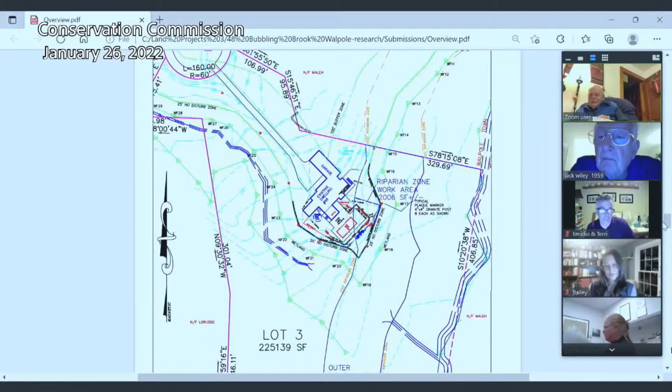Well, I've got a couple of questions about the alternative sketches. Like on sketch number 1, there are 2 areas that I don't understand. What's the dark area, and what are the 2 crosshatched areas? What does the crosshatching indicate?

If I might, this crosshatch area was an area where we were going to put in some major geogrid. We realized the wall was going to be 10, maybe 11 feet high in certain areas, so we had the major geogrid. And because we were trying to minimize, we obviously couldn't get into the no-disturb zone, but we still needed a work area in this section here. We were going to use a riprap slope at a 1-to-1. This was rejected by Mr. Madden. Yeah, again, it was a preliminary sketch. We came up with 2 or 3 alternatives, and we just kind of looked at what we could do on the site while staying outside the no-disturb zone. So that was the intent of this particular sketch, and it was rejected by Mr. Madden.

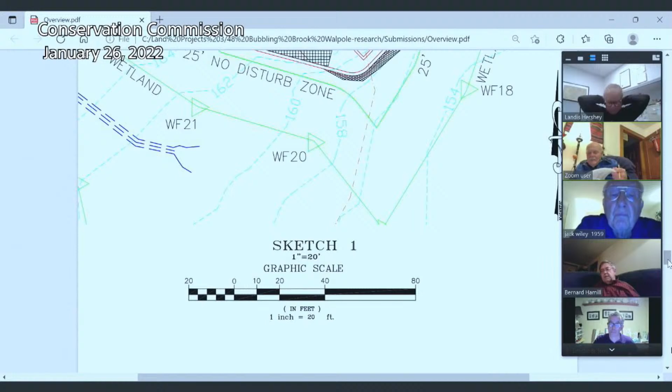Anything else, Al? The crosshatched areas on all 3 of the alternatives are the geogrid to stabilize the wall. Is that correct? That is correct. Okay.

Then I have no further questions. I don't think we had anybody in the audience, did we?

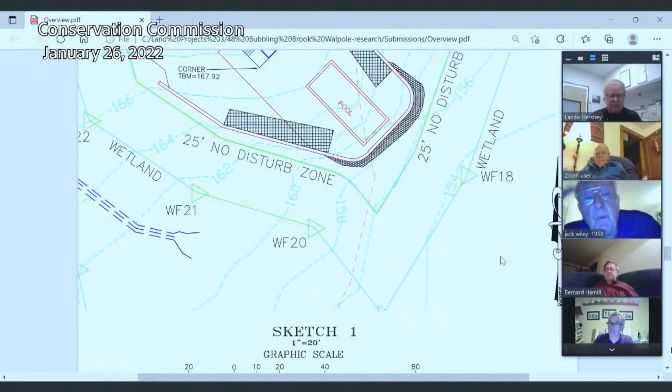I have one question though. You show, if we go back to the other one, there were some little red squares on those. Are those no disturb signs? Oh, those were the plaques that you requested. They will be put in. There's a note on the plan that they will be put in before any construction starts. I couldn't read what they were, but I thought that might be it.

Okay. So is there anybody in the audience that wants to comment? Hearing none. Someone will make a motion to close the hearing?

So moved. Second. All in favor: Dean, aye. Bailey, aye. Doug, aye. Emidio, aye. Betsy, aye. Al, aye. Jack, aye. Okay, hearing's closed.

Now, Landis, do you have any items in particular for the order other than the normal? No, so I would just reference in the order that the no alteration plaque should be placed prior to the construction of the pool. It is on the plans, but I also like to put it in the permit.

And again, just no further alteration of the riverfront area. I would just remind the Maddens that there wouldn't be any additional tree cutting in the no alteration area or the river riparian zone.

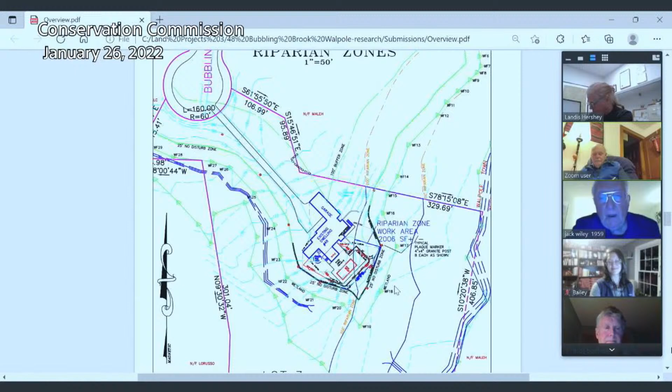Okay, whenever you're ready, Landis. I think that concludes our public hearings. Right, are you ready to proceed? We have minutes.

Yes. You have in here November 29th. I don't think we met the 29th. That was a special meeting in regards to one item, which I still have to write up. Okay, so that's still pending.

Now, December 8th, I think there were just some revisions that had to be made on that. People had commented on that when we didn't vote it at the last meeting, I believe.

Subject, do we need to see those? Was that the point you were going to make? I sent out those minutes with the changes. You did? Yes. Okay, okay.